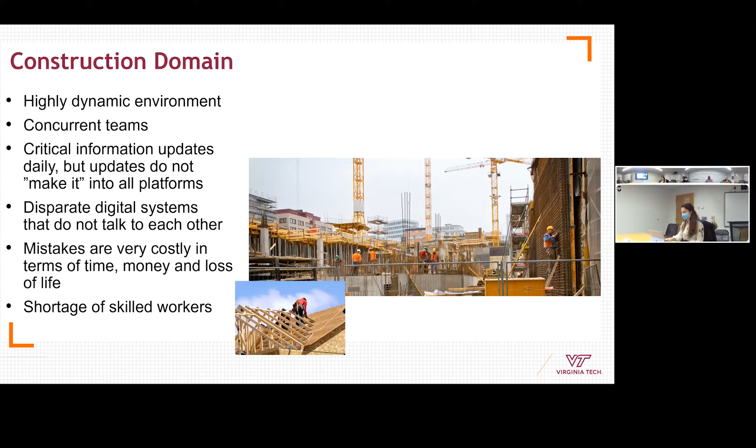And also we have different digital sources for the information we are creating throughout a construction project, some of which including the blueprint, 2D blueprints, 3D models, schedules, change orders, instructions, different types of information that are created before the project starts and get updated throughout the life cycle of the project.

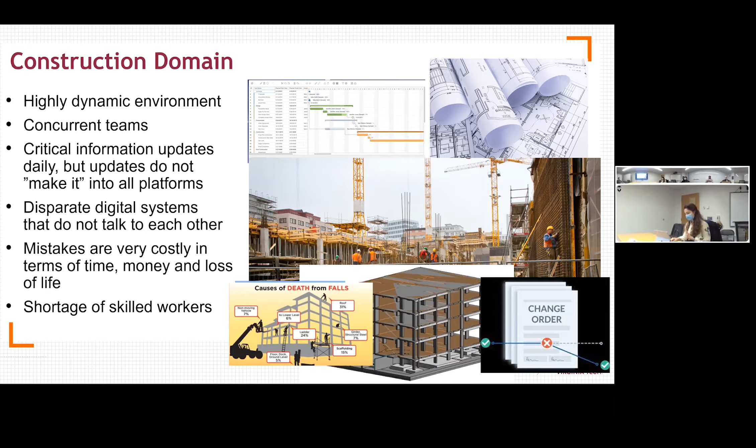And because of that ever-changing kind of environment, any mistake can be very costly for the owner and also for the workers. It can cause deaths, fatalities, and incidents just because people are not receiving the information that they need. In addition to that, right now we are at a crisis level in terms of having access to skilled workers. So imagine all of that, and now let's imagine the future, and I would say even near future.

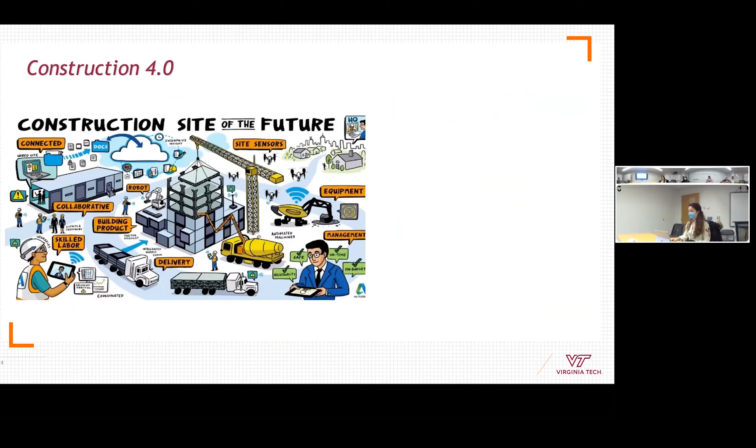We all have heard of the fourth industrial revolution, Industry 4.0, and it's finding its way slowly into the construction industry, where we imagine a digital technological environment where everything is connected to everything else. In such an environment, we started using different technologies, including Internet of Things sensors, robots, and I'm considering unmanned aerial vehicles and unmanned ground vehicles, as well as automated equipment as robots as well. I hope robotic friends are not gonna pick on that.

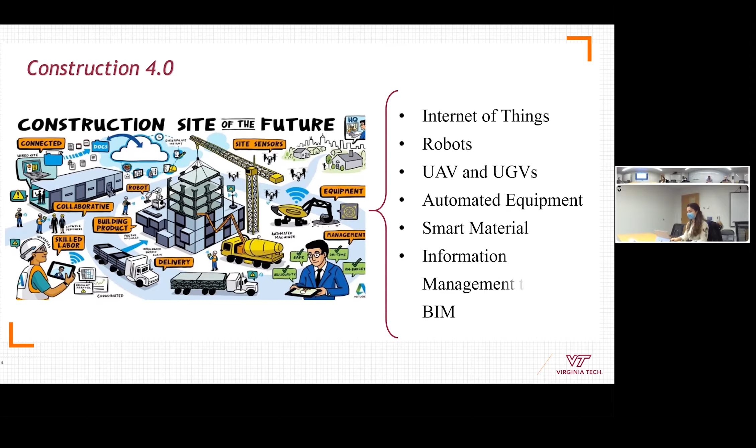So these are all expected to help us improve our processes, automate our processes, and collect some kind of information from the job site, or perform tasks that usually are not easy to be done by the workers. We are also having smart material, like let's say smart concrete, that can define if it has gained the strength that it has been designed to. And also we are talking about proper information management through building information modeling, so we can manage all this data that we are collecting from the construction job site.

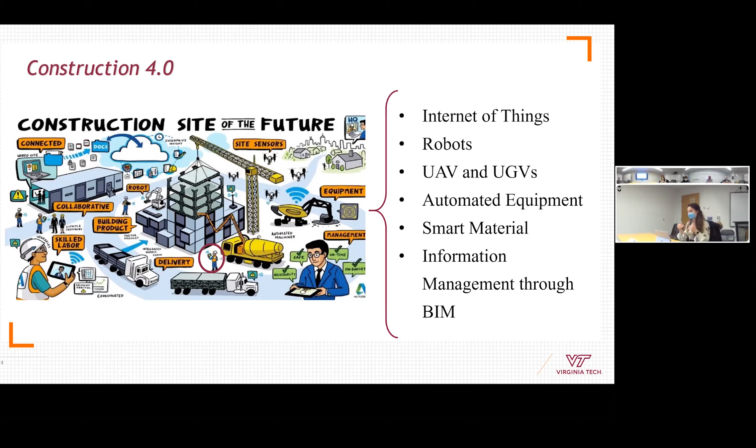But in between all that, what we are ignoring the most are the workers. Unless we are imagining that we are not going to have any workers and they are going to be completely replaced with the robots or all the technologies that we are introducing to the environment, we have to do something for them as well. And the reason I'm saying that is we are changing the landscape of their work. Everything around them is changing. And everything is being augmented, but we are not thinking about augmenting the capabilities of workers as well.

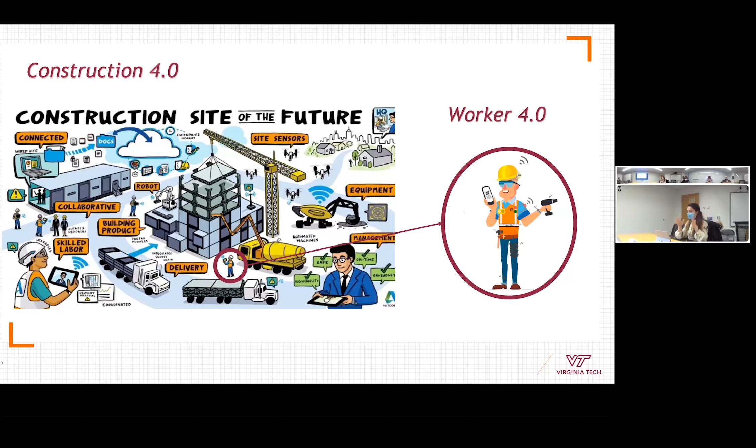So I am calling that augmented capability worker the worker 4.0. That is a worker that can make use of all the information and technologies that are collected from the construction job site and is at the same level of intelligence and analysis of data that everything else in the job site is. So now this worker 4.0, there are a lot of technologies around him. He is seeing drones and cameras and sensors collecting data from the materials and all the processes around him.

We also are giving them different devices. We are giving them AR glasses. We are giving them smart watches to collect their health information. We are mounting EEGs to collect their physiological signals. But unless we consider their characteristics, none of these technologies that they are surrounded with is going to work in their benefit.

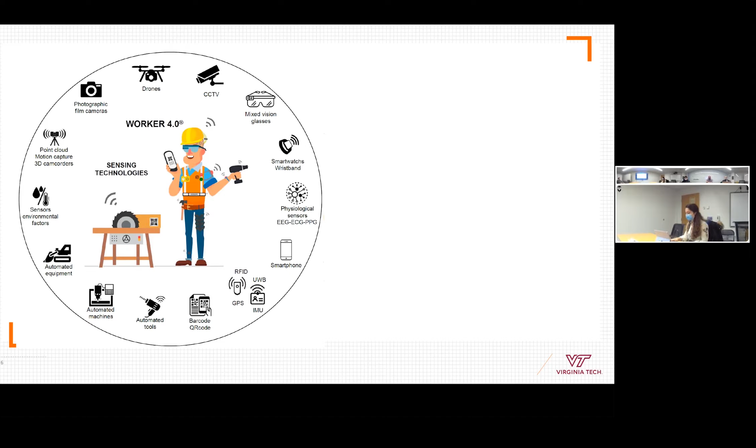And to help them with all of that, there are different things that we have to consider. First is how these technologies can help us know how skilled they are and maybe assign their tasks based on their skill level. How we can realize if they are fatigued or not, or maybe release them from some activities or lower their loads for the day. How we can realize how motivated they are and maybe design approaches that can motivate them more.

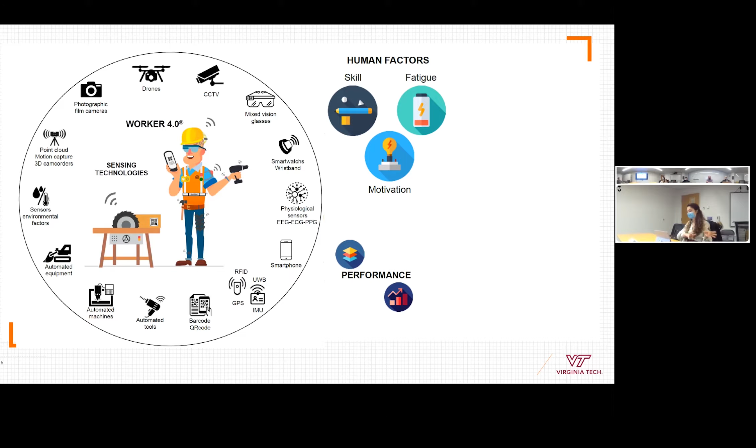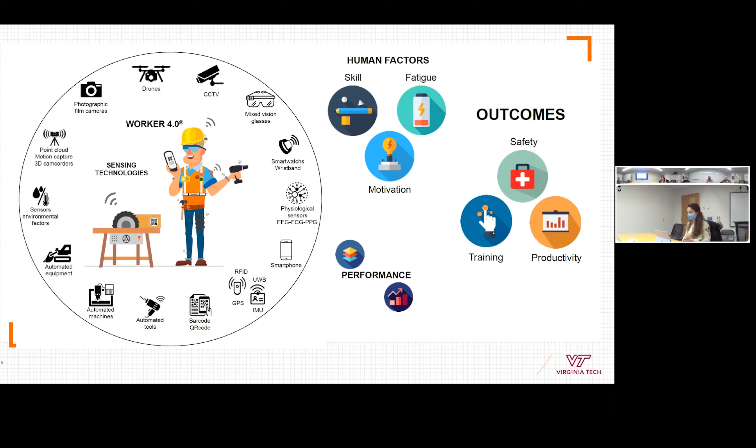In addition to that, we need to have a sense of their performance and know, again, how using these technologies is not going to distract them from what they're doing, and instead of that, it is improving their performance. So when we consider all of that, the outcomes are going to be improving their safety, preparing them not only to use the technologies, but to work safer in the job site, and also improving their productivity. So that's where my work lies.

I'm trying to use different technologies to improve safety training and productivity of current and future construction workers. And for that, I am working on different projects. I'm designing different technologies. I'm working on a smart wearable, virtual voice assistant, as well as immersive technologies to improve all these three aspects. And for the sake of this meeting, I'm going to present two of my projects: using VR, group VR, to improve safety of highway construction workers, and also intelligent AR for the future of construction workers.

I'm gonna start with the VR project. What is important in my field when using these immersive experiences is which one is going to fit what situation. For example, in which situation you can cut the person out of the reality and use virtual reality. For sure, we cannot use that on a real job site when they're doing their job, because that is not going to be in their benefit. So depending on the application, the kind of immersive experience you're going to create for them is going to be different. For example, what is essential to keep workers safe is proper safety training.

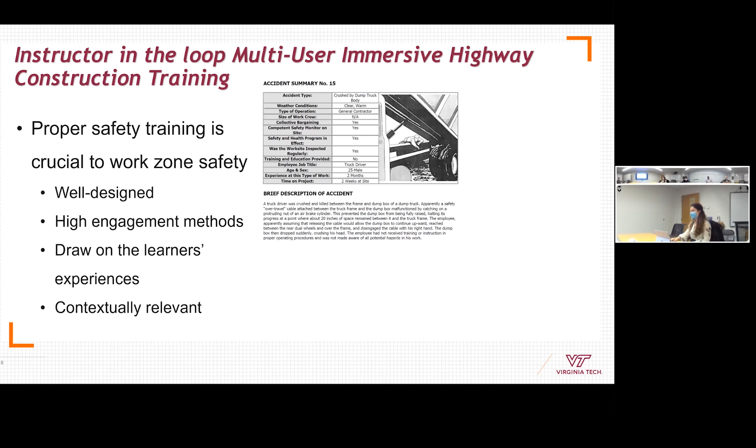And to have a proper safety training, it should be well designed. It should be the same as anything else that you want to teach anyone. It should be engaging, it should be based on the experience of the learners, and it should be related to the context of the work that they're doing. But, well, this is the kind of training that workers are currently receiving before doing their job.

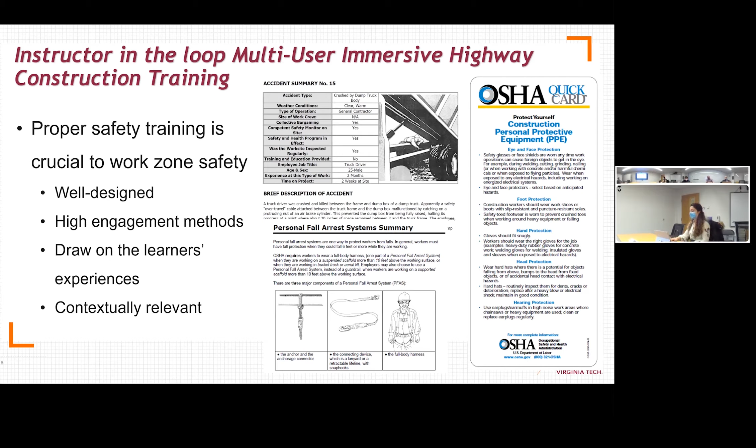Because, and that's understandable, because of the number of trainees in a classroom and the limited number of instructors that we have, they cannot have more engaging methods, or the instructor will not have the chance to take the workers into a job site and show them real hazards or real experiences they are going to be exposed to later on the job site. And we have all taken the Title IX training. This kind of training is boring and it's not teaching you anything because you are not actively involved in training.

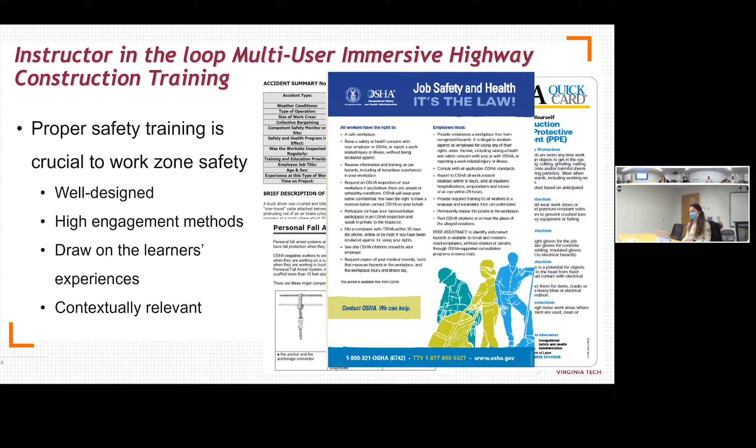So we thought virtual reality can help with that because it can create a more active learning experience for the workers. They are in a training phase, so they're not on a job site, so it's okay if they are cut out of the environment. But one thing about the head-mounted display was that the experience would have become a solitary experience. And we have a group of trainees in a classroom who want to be trained, and that collective engagement in learning is going to be in their benefit.

So we thought also when they are wearing the headset, that is going to also cut them from the instructor. So we have to design a training that complements the current trainings by having the instructor in the loop and creating a group-based experience for the trainees.

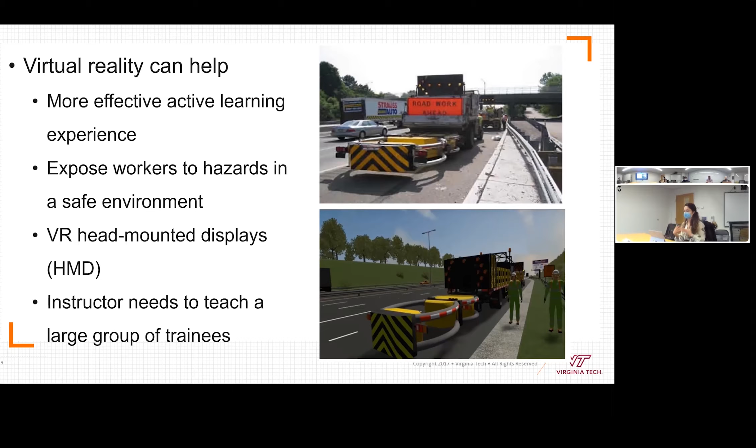So we designed, with the help of Todd, this situated learning scenario-based training that has the instructor in the loop. It is group-based, so it is for the whole group of students or trainees in a classroom. It is scalable, it can be used in any classroom, and it is based on the needs of the people in the class. So the instructor has the ability to improvise on different scenarios based on the needs he sees in his trainees.

So what we did, we collected data from a real highway work zone and then translated it into a VR environment. And we tried to see, depending on different locations on the job site, placing the worker, what kind of hazard they are going to be exposed to. And that helps the instructor try to walk the workers through that experience and makes them understand the hazard or the risk they are going to be exposed to later on when they are on a job site.

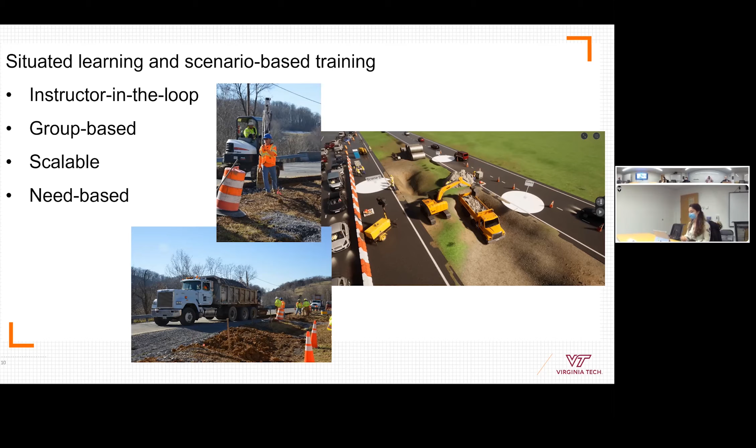The learners in such an environment will have the opportunity to recognize the hazard in different situations, different environments, different conditions, then to evaluate the severity of the hazard and provide control strategies for each of the hazards they can recognize. And you can see, we are considering different scenes in the job site in different locations because depending on the location the worker is placed in, he or she is going to be exposed to different types of hazards.

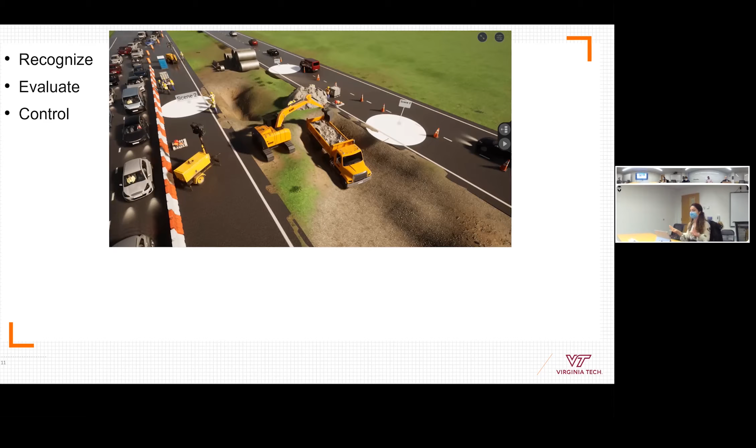And those hazards are even different when they are in the same location, but let's say they are there during the day versus during the night where they do not have much visibility, they cannot see well. So all of that is going to help the construction workers be prepared by being exposed to realistic scenarios before they actually put a foot on the job site. And also that experience is safe for them. They see the hazard, they are so close to the traffic, but it is all not real. So they are not becoming unsafe.

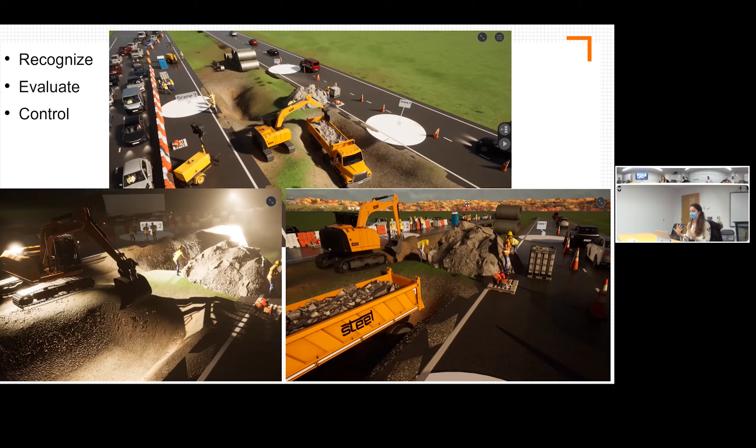So as the first step to kind of experiment with this method, this training, we used the 360 projection at the cyclorama in the cube to project the scenarios and see how it's going to help us create the environment that we were looking for.

I'm muting it because it has our conversation. All right.

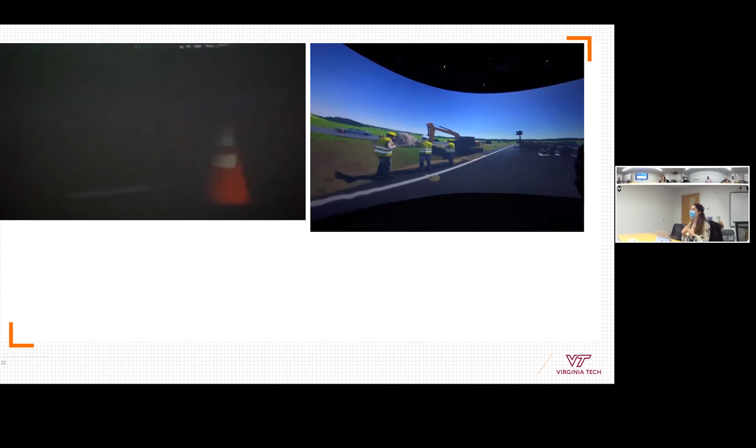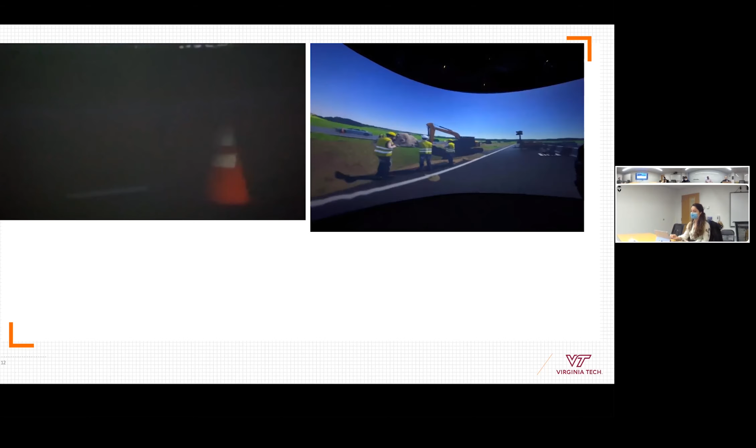And you can see, although it is virtual, it's not real, you feel yourself so close to the traffic. And that's exactly the experience that the workers need to have. They have to sense how each of their actions is going to turn out when they are in a real job site. As the next step, I'm working with Todd and also Pilar and many other people to kind of move that into the classroom and have one person wearing the VR headset and the instructor being able to share that environment, share that experience with the whole class. So they are going to learn through collective engagement in the scenario.

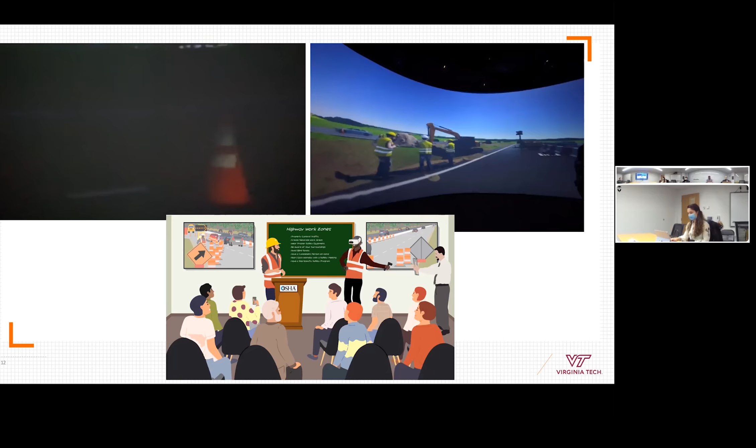That is for VR. And again, because the training happens before they set foot on the job site, we can place them in a location that is not real. We can distract them. But then when they are on the job site, we do not have that option. So we are gonna need to use another immersive experience for them. And that's where we started thinking about using intelligent AR, which is going to be a bit futuristic.

Right now, we have some AR applications in construction, especially used for design when you want to see the final product, the final project, and see if it's satisfying the requirements or if there are any clashes that you haven't accounted for before. But the problem with current approaches to use of AR in construction is they are providing a one size fits all. Which we all know when we are giving a human something, you cannot use a one size fits all kind of approach because people are different, situations are different. And based on that, the experience that different people are going to have with the same thing is going to be different. And especially going back to the dynamic environment that we have in construction, the context of use matters.

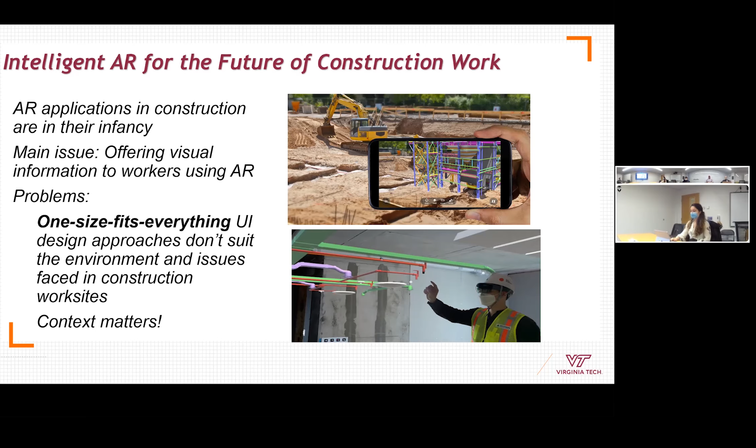So we started thinking about how AR in construction can become more intelligent. And to become more intelligent, it needs to consider a lot more factors. It needs to consider characteristics of the workers. It needs to consider the work they are doing. It needs to be able to recognize, detect the work they are doing. And also it should have a sense of what is going on in the environment. Unless we have all of that, the information that is going to be conveyed to the worker is not going to be of much use.

So the intelligent AR that we are envisioning leverages the current headset sensors to get the context of the job site, get the location of the workers, and based on that, connect to the information sources. Let's say connecting their location with their schedule, it is going to recognize where the person is and what he's working on. We are going to use computer vision, machine learning, and artificial intelligence models to process how to use the raw information that is collected.

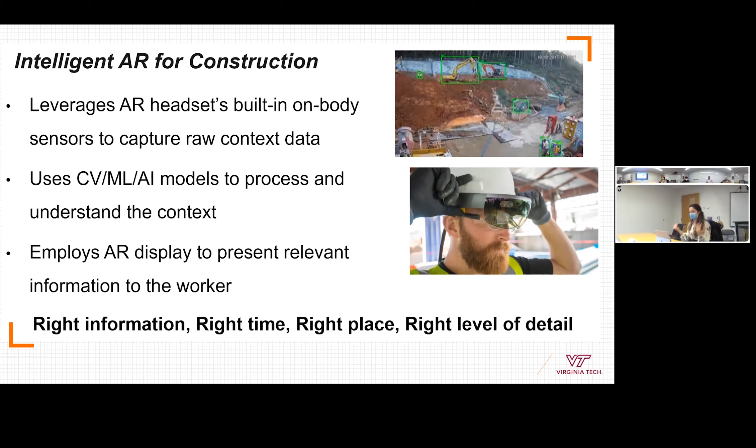So let's take a look at that from a scenario. And I know that Doug and Joe had presented that last week. So let's say we have a welder working on a steel job on a very big commercial project. The intelligent AR that we are envisioning is going to recognize when he arrives on site and wears the headset. The AR system is going to recognize that he's tired. So maybe it can send a notification to the supervisor to change the activities for the day, but at the same time, it can be more rigorous in sending alarms in terms of safety.

Also, then it recognizes what activity the worker is set to do and helps him or her in doing the task through showing step-by-step 3D visuals that show the steps that maybe he needs to do or maybe he missed. And then also after he finishes, it can detect the completion of the task and send that information to the information systems that we have.

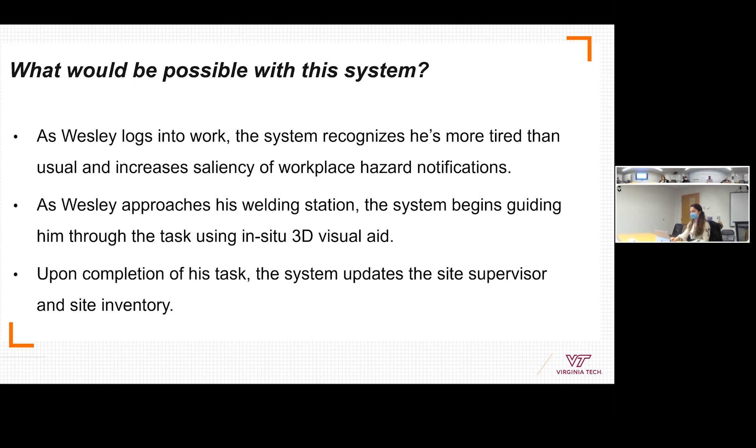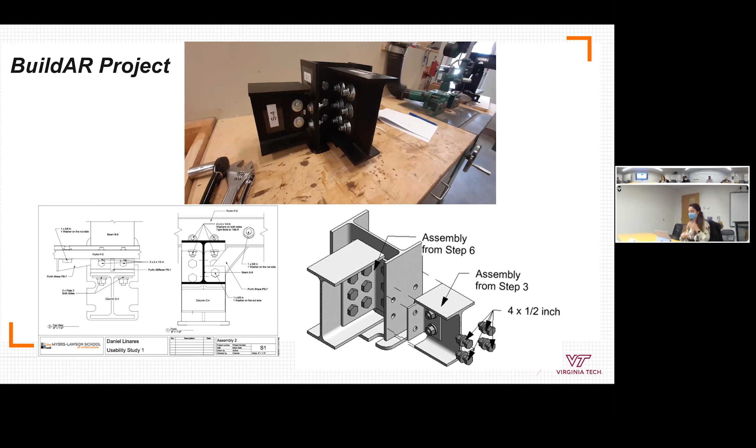And imagine if they are not skilled enough, if they are a new worker or a worker that has been moving from a different sector to that sector, how hard it's going to be for them to understand everything or grasp everything at first glance. So having this audio or visual kind of help or instruction is going to be very helpful for them.

And here is a video of the experience. So the students created the experience and instructed the participants on where each of the materials were, what they needed to do. Okay. So it shows where to pick up the material, where they have to place it, what steps they have to go through to complete it. And at the end, it's going to tell them that the task is completed.

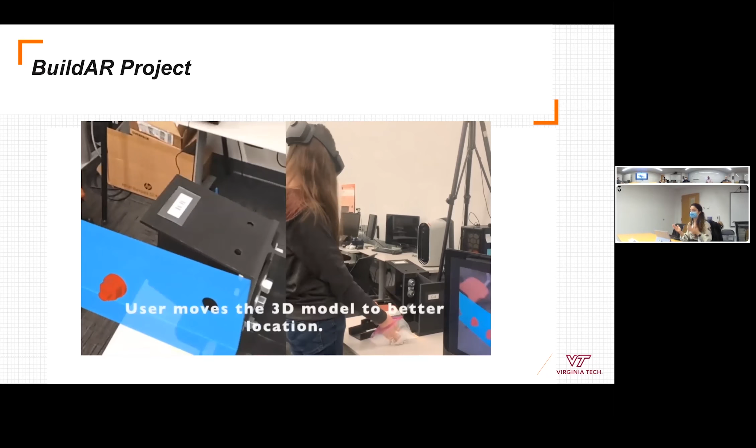So that simple example can show how providing that kind of on-the-spot information to workers, especially, again, newer workers, can be helpful in upskilling them and getting them on the job site sooner than it usually takes for them to get going on the job site. So again, I'm no expert in developing any of these experiences, but I am so happy I got to work with people who helped me create those experiences for the workers.